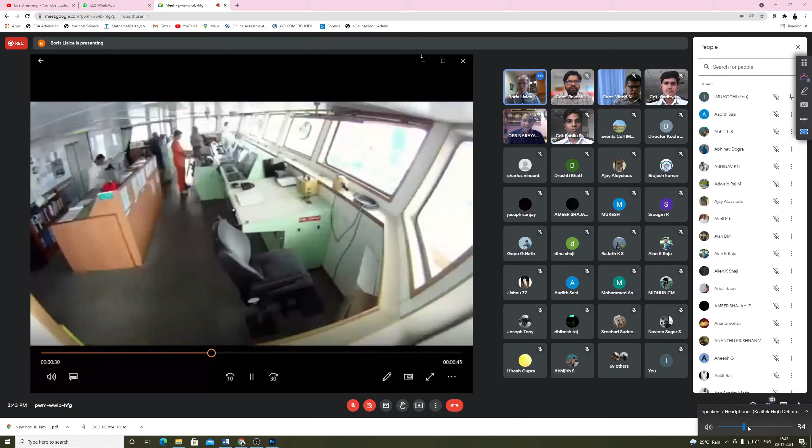I hope it is coming up. There it is. You need to give the sound, Boris, you need to give the sound. I have sound, I can hear it, I don't know if you can hear it or not, but I can hear the sound. I'll try again, because the sound is at maximum so it should be working. No, we cannot hear the sound of the video. Okay, anyway, the video is only another 10 seconds, so it's not much, it's only pictures. What I wanted to go over with this one is just see the pictures of the shipping.

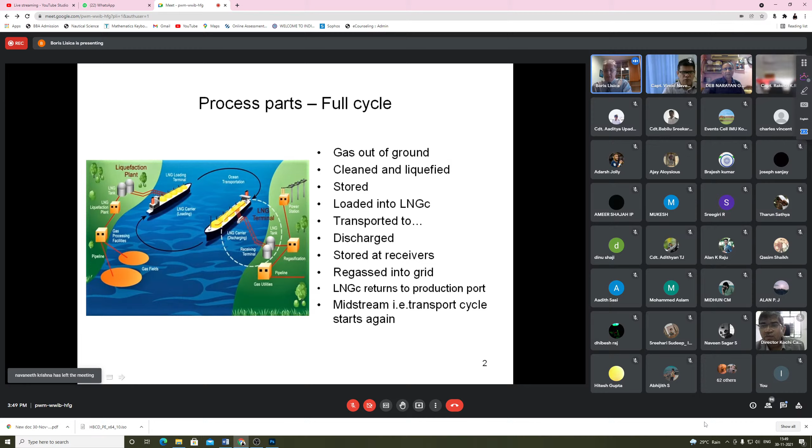I would also, before we go on, actually change the screen so you can look at a little bit better pictures than the one before. I would also like to say how much shipping is part of the total cost of LNG production and sales and everything. Shipping actually takes 20% of the total cost, so it's a very big cost, shipping. Liquefaction is the biggest cost, around 40%, and shipping 20%, this is over 60% just in these two. Production is the cheapest, actually not only production, but exploration and production is the cheapest at 18%.

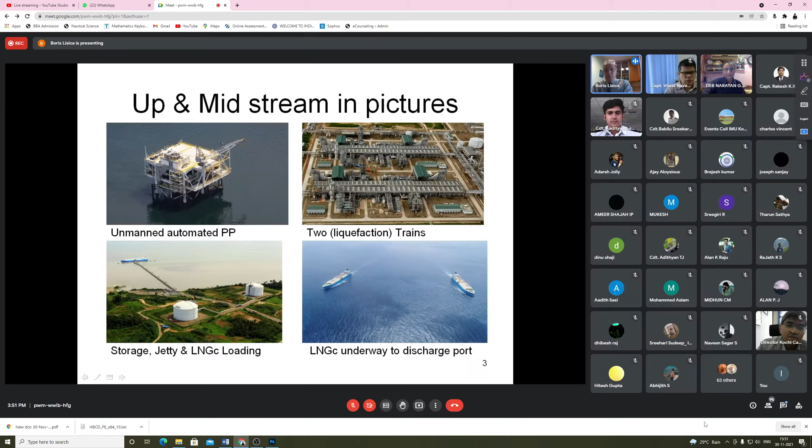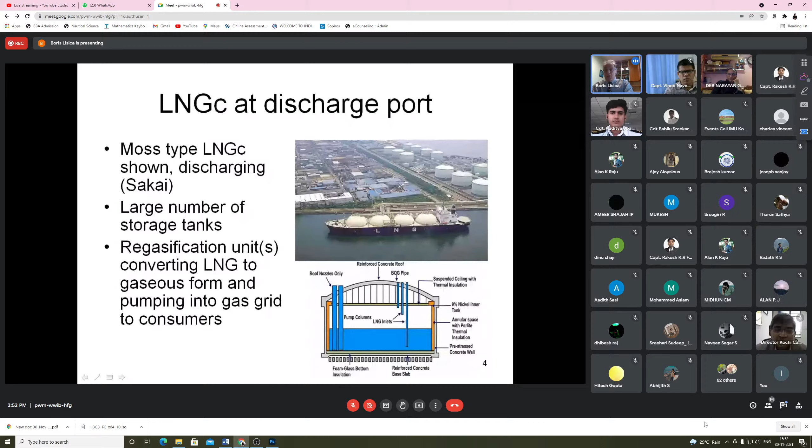You can also see an LNG tank, shore tank, which are very big structures, and the original ones, when all this business started, were rather small, and they were usually sunk into the ground. Today they are all above ground on special foundations, and they are getting bigger every day because technology and everything is catching up with all this. So now they are to the tune of 200 to 250,000 cubic meters each. When you stand underneath one, it's enormous, it's huge. That's just to put perspective onto some of the things that are happening in this industry.

But you can find any of that if you are interested in studying the gas further. You can find it anywhere on the internet or in publications specialized for it.

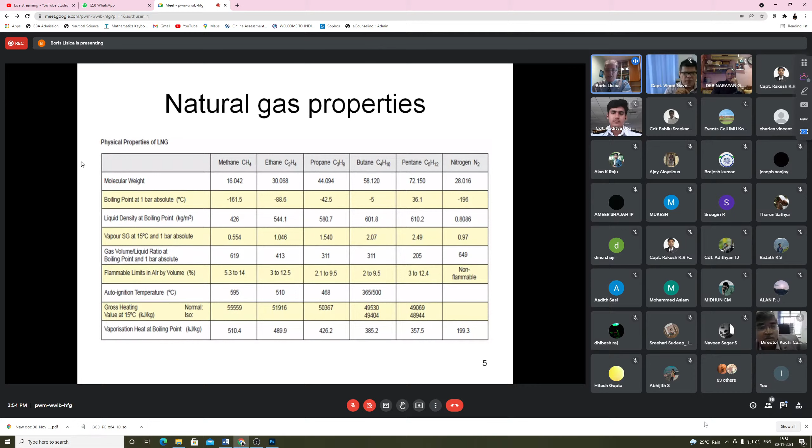Although I would say if you're going to go there, you have to study a little bit more beforehand, because some of the things will not be easily understandable. At least they weren't to me when I was a cadet learning the LNG business.

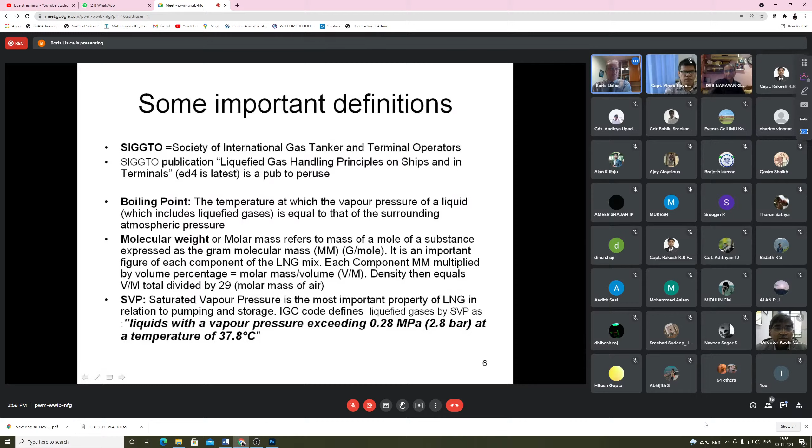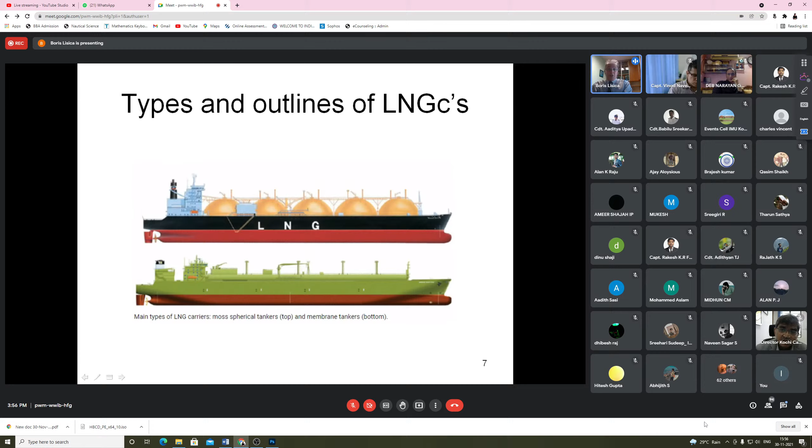Now we will touch on the LNG ships boom. At least when I started at sea, this was something that was just heard about - an isolated niche, same as the entire industry up to the 70s. Then it slowly started picking up, and from the 70s by 2000 there were about 130 LNG ships in the world.

Most of them were Moss type, but membrane ships started picking up in the 90s, with maybe 30 membrane ships by 2000, or a bit more thereabouts. Then in the 2000s the boom started in a big way, at an unbelievable rate. Qatar was, until just yesterday so to speak, the biggest producer of gas in the entire world, producing 77 million tons of LNG annually. Australia has only overtaken them in the last year or two, but Qatar is still very, very big.

That's the early 2000s, when Qatar came online with ships associated with Qatar gas. By 2003 there were already 153 ships, and by 2004, 176. At that time Moss ships started going on the new building decline because of size - at the time they could not go over 135,000 cubic meters capacity, but membrane-size vessels went up to 150,000 by the early 2000s, and then kept on increasing.

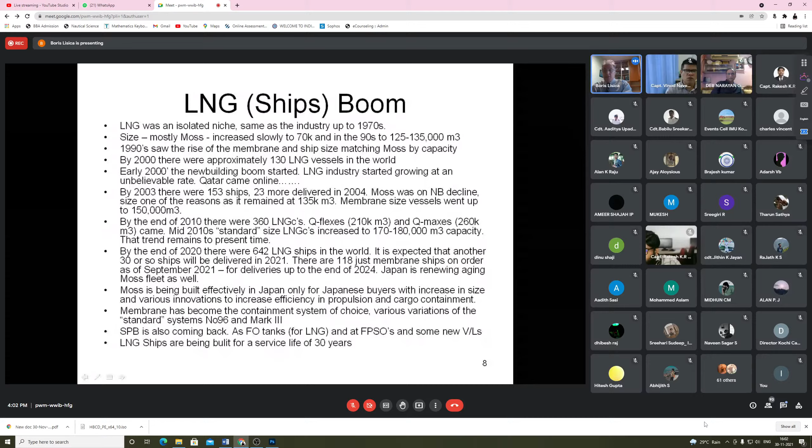Anyway, we go to the next slide, which shows actually what is available of the containment systems for LNG carriers today.

As you can see, this is IHI, meaning Ishikawajima-Harima Heavy Industries of Japan. They invented SPB in the late 80s, and the first 2 ships ever built on this were in 1993 for Alaska trade, and these ships are still in service today. The aluminum alloy thickness is 30 millimeters, and insulation is polyurethane foam 270 millimeters. Moss type is also aluminum alloy, same as SPB, but the thickness of the tank is 50 millimeters.

Then you come to the membranes. GTT NO96 is Invar, which is a 36% nickel alloy. GTT Mark III is stainless steel, 1.2 millimeters thickness of the primary membrane.

What I would like to say while we are on this screen is that we need to mention the IMO IGC Code. IGC stands for International Gas Carrier Code. It is a lengthy full name for this convention that is in force, and the latest one has been in 2016.

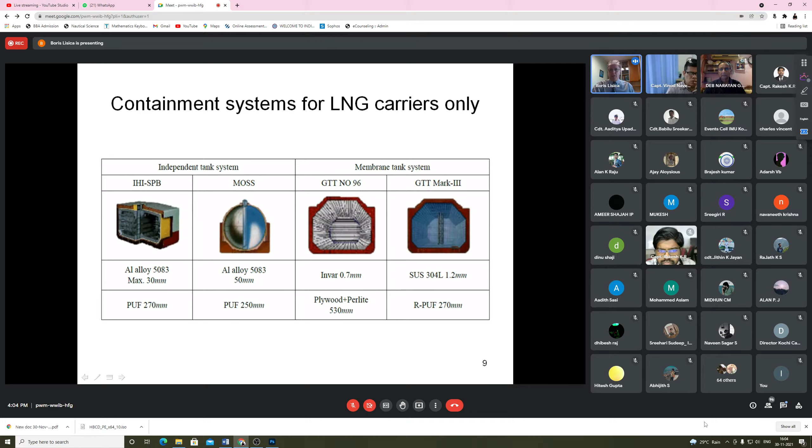The one before that was in 1993, and most of the day's ships were built on that code. However, there were quite a number of improvements as the industry grew and the technology advanced. All these new improvements and new insights were built into the 2016 IGC Code, and this is the governing publication. It's the law for gas tankers. The full name of that publication is International Code for the Construction and Equipment of Ships Carrying Liquefied Gases in Bulk. No wonder somebody shortened it to International Gas Carrier, IGC Code. It sounds much better.

And here we are on SPB in IHI type of vessel. You see these 2 ships on the first slide. They look like an ordinary tanker. You don't see anything different. They have a little compressor house in the back end, in front of the accommodation. Look like an ordinary tanker. Today, the new buildings, in order to increase capacity, have raised the deck up to the trunk deck and raised the tanks up.

Otherwise, it was not possible to build bigger tanks. So they look a lot more like membrane vessels, the new ones, the 4 new ones that came just 2 years back.

This picture shows the tank from inside. The tank is, in essence, a complete crude oil tanker tank, because it has all the girders, all the swash bulkheads, center bulkhead, everything is there, which makes it a very safe tank and reduces sloshing of the liquid. That's why they are the safest, and that's why they are the most expensive, I guess.

This tank is being carried by a huge crane, as you can guess, to be fitted into the hull of these new tankers that have been built just a few years back. This slide shows how it looks underneath the tank. This is the support and insulation. Insulation, if you remember, is polyurethane foam.

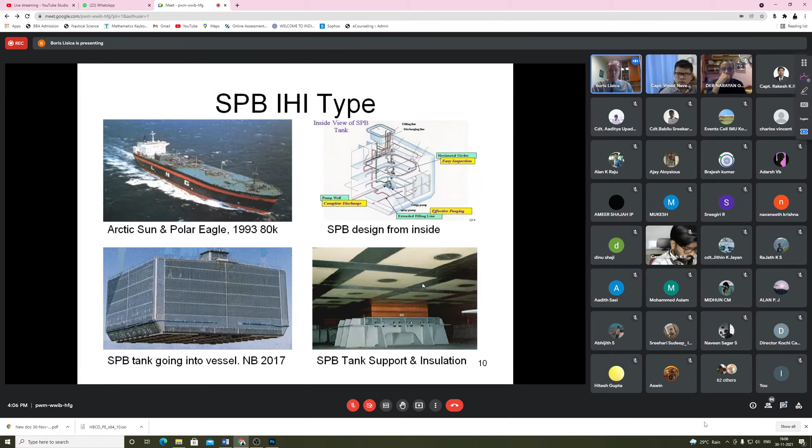We go to the next one. These are all what we are doing now. We are looking at building types of the LNG carriers. And here you can see what it is there for the Moss type. So this is the tank, how it looks like.

It's the old tank. The new tanks are a little bit more elongated in this middle section. They call them apple tanks, like apple tanks. They elongated the equator, and the top sphere stayed the same as the bottom sphere, but the middle was elongated to increase the capacity, because that was one of the issues with Moss type.

They couldn't go further than a certain capacity, because that would make the ships too big. This way they have managed to keep the ships at Panama size, which means being less than 49 meters, this new Panama Canal, not the old one. And that way they have come back into the business, because at 135,000 they couldn't compete anymore.

This slide shows you, this is the tank, and this is the skirt. The equatorial ring in the middle, skirt is something that the tank is sitting on, in the hull. Otherwise it will be going all over the place. And it is supporting the full weight of it.

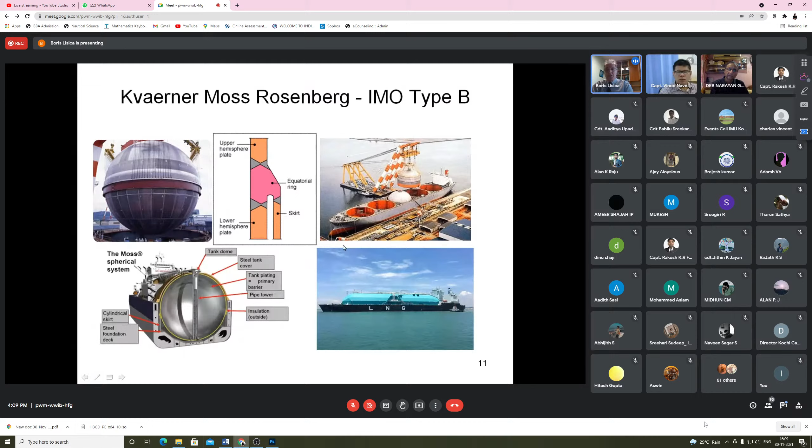A lot of improvements in the Moss technology coming. We will say a few words about that one later.

The next slide is showing a membrane, and this is a generic view of the tank, how it is made. Here in the back is called a pump tower, and this here is an actual cut drawing, or a sketch, of the Mark III membrane tank, indicating all insulations and things like this.

And here below, this ship is Mark III. The difference is right here, Mark III versus NO96. You see the front end of the trunk deck is sort of square. And here it is narrowing down to the front. This is because of the construction issues with NO96 as opposed to Mark III. They have to narrow down the forward end.

This picture actually shows the ice-breaking, classified Arc 7. This is for working effectively in the North Pole or South Pole. These are icebreaker LNG carriers. We have been mentioning them before. I will show a picture later on how it looks when it's breaking ice.

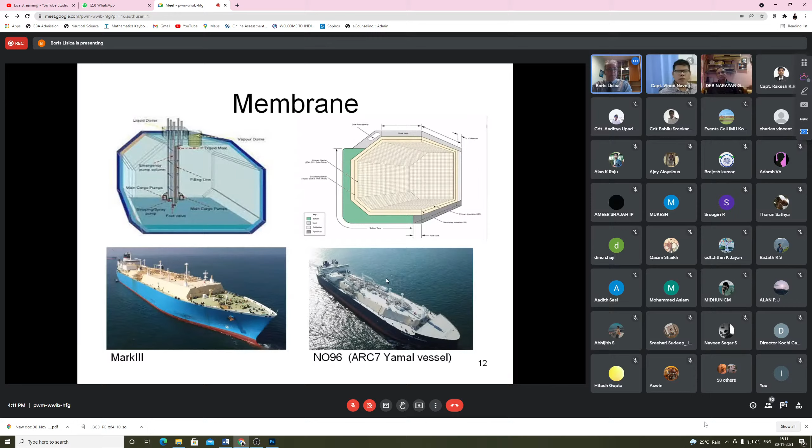Let's go to the next slide. That will give you some ideas of the differences between Mark III and NO96.

I have already mentioned most of it, but what I would like to say is that the company behind these two is one company. Actually, there were two companies in the early 90s that merged eventually into one company. The first one was Gas Transport, that company invented NO96. Then Technigaz company invented Mark III. These two companies merged into a company called GTT, which is a short word for Gas Transport and Technigas. They just collected the names together.

When they just merged, they put on the market membrane type CS1. That one was not very long lived. Only 3 ships were built with it, but it was an interesting combination.

It was a combination of Mark III and NO96, where the primary barrier was Invar and the secondary barrier was triplex. The triplex is epoxy, sort of a composite cloth. But that one, I think, didn't fare very well, and they stopped production and carried on improving each of these membranes. They have made considerable improvements in insulation and just about everything else.

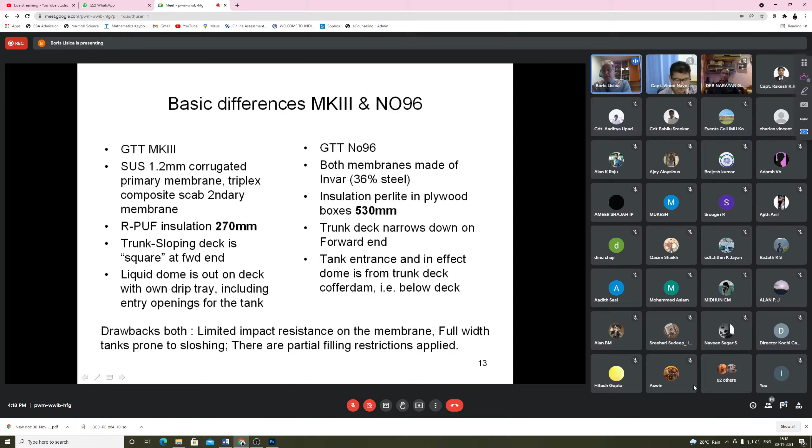Now we go to one very pretty picture. This is actually a picture of the tank of the ship, which was delivered. This was done on delivery of the vessel I was on. As you can see, it was done by a professional camera. This is Mark III membrane, and the tank is about 45,000 cubic meters.

When you come into that tank, it's an enormous cavern. When you come down through that pump tower in the back, which is over 30 meters tall, and look down into that hole, if you are suffering from vertigo, it's not a good feeling. It's an enormous cavern, but spectacular, as you can see, to look at.

The primary membrane, as you can see, is corrugated stainless steel. Of recently, they have improved this because corrugation acts as bellows, as expansion joints, since stainless steel contracts considerably, and there has to be some expansion bellows to allow it to do that.

GTT has improved on corrugations even further. So these ones here, if you see the pointer, are now also corrugated. The longitudinal ones not yet, but these are special machine corrugated. Each piece of membrane comes in 3 meters by 1 meter pieces.

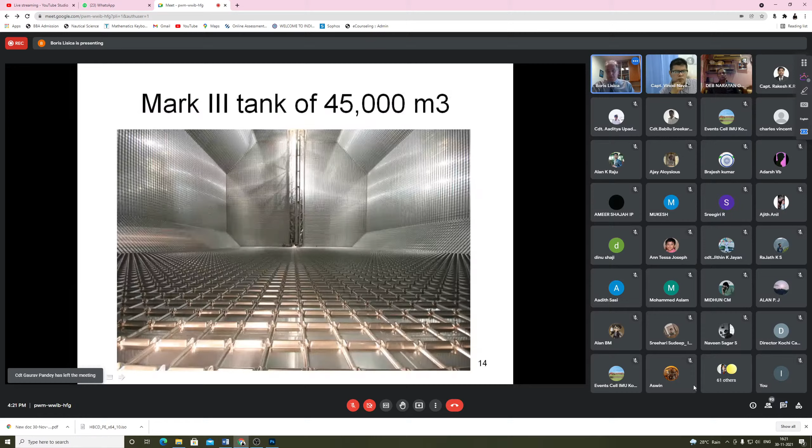Now we will go to the picture of the NO96 tank. Here you can see there are no corrugations. There are just these strips on the bottom, because Invar, during tank construction, is made into a U shape.

It comes as a roll of metal and then goes to a special machine that makes a shallow U. That shallow U is then inserted into the insulation, and in the middle of these two U's there is a strip that is actually holding the membrane in place. Then all three units are welded by a robot.

That robot is a fascinating machine to watch. It travels the full length, all 45 meters of the tank, from one end to another. The corners the robot cannot do - those are done by highly qualified and experienced welders.

These welds are very carefully checked by experts before they are allowed to be okayed for use. An interesting fact about Invar is that despite 36% nickel content, it will still corrode if introduced even to just humid air.

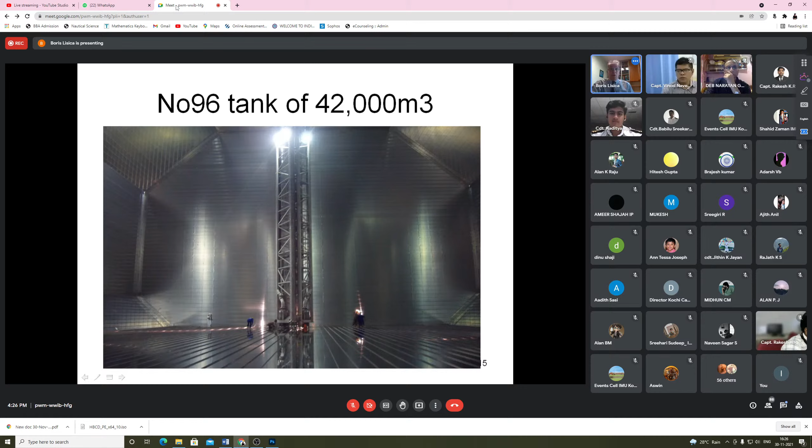Now the next slide goes to propulsion developments. Why I am going on to this is because it's important - it also drives the industry towards membrane improvement and insulation improvement, and has changed the original concept of the LNG carrier. The LNG carrier originally, any kind - Moss or membrane or anything - was a steam turbine, single prop vessel, usually with a bow thruster.

That first changed with Qatar Gas building Q-flexes and Q-maxes. The original vessel always burned boil-off gas in the boilers, producing steam for propulsion. Now Q-flexes and Q-maxes come along and they don't burn anything - they fitted a liquefaction plant on the ship and two traditional main engines, each on one propeller, running on heavy fuel oil. This was a big, big change in the concept.

However, that didn't prove out so well. Most likely, I hear on the grapevine that they are trying to think of converting these engines and diesel generators to burning gas, because HFO is both more expensive now than gas, and also a problem with NOx and SOx reductions that IMO is pushing - they'll never achieve that on heavy fuel oil, even low sulfur heavy fuel oil. So like in the tanker industry, this is going to be a big problem for these ships. However, the conversion cost is about $20 million, so I'm not sure Qatar Gas is going to invest in it. Maybe they'll rather scrap the ships than go that way, but it remains to be seen.

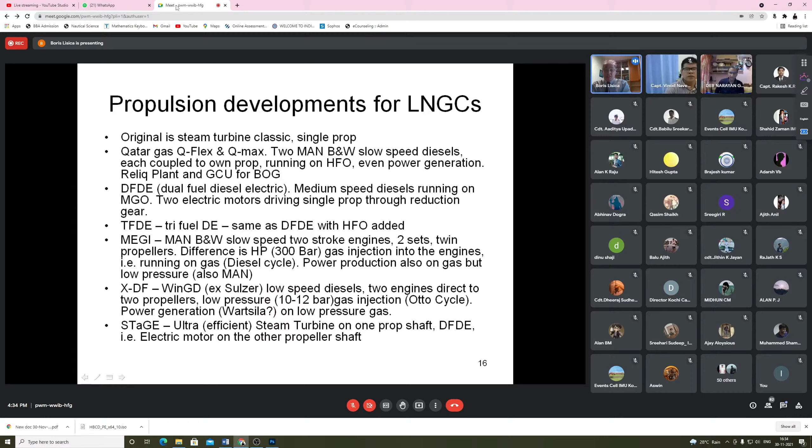It was one generation of ship that was built only on this UST system, and then of lately they came with this STaGE, which is UST plus DFDE. So you have a steam turbine driving one propeller and electric motor driven by generators on the other shaft, which is a very interesting detail for how the shipping is going, in which direction they want to have facilities of both for some reason.

Anyway, now I think we are finished with highly technical details. We'll look a little bit at better pictures. And this is a picture straight out from the shipyard.

And this is a keel being laid. What was traditionally keel being laid is a very small piece of steel. Now the pieces are coming in gigantic bits and pieces like this one.

And this is for the LNG carrier, and you can see the scaffolding there. Scaffolding comes onto the keel blocks right away erected so that they can carry on with the membrane construction as soon as the ship is closed.

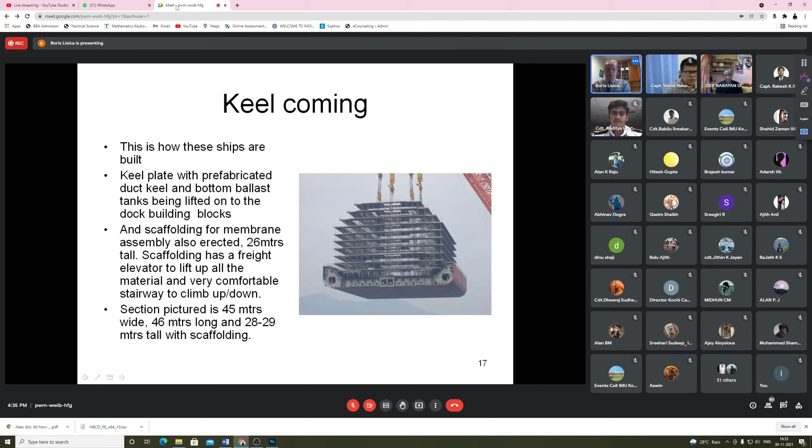And you can see how big is this section. When you are nearby one and hanging up in the air, it's enormous. And this is part which was there in the air is coming on the blocks, and you can see here.

Here is one tank, this is a cofferdam, and this is another tank. Well, it's not a tank, it's just a keel. And then comes the complete ballast tank on the side and the upper deck, and then comes a trunk deck on top, and comes a bow and the stern, and then the ship is launched.

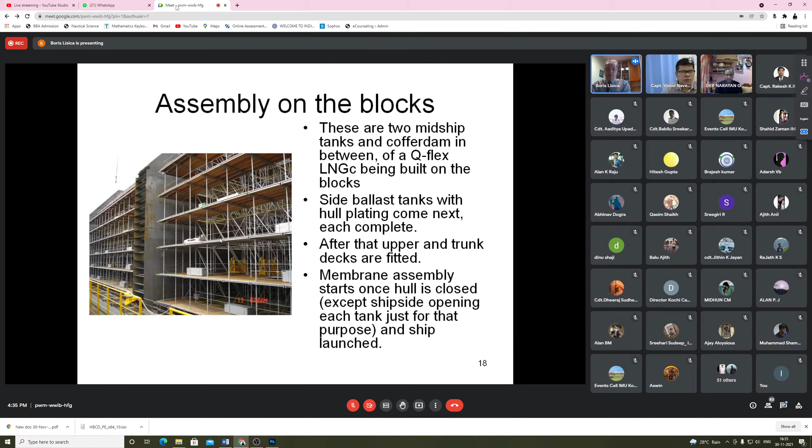Once the ship is launched, the construction of the barrier starts. Next slide is more technical, and it shows a pump tower.

This makes for a picture which is interesting to see, and to the eye who does not know, it looks also very strange. But the pump tower is over 30 meters tall and three-legged, three legs.

And this here is a cargo pump. One on the other side is another one, and here you have filling line on the right slide or slide picture, and in the middle is a pump tower base, because a pump tower obviously cannot be attached to the membrane, and it cannot be attached also to the ship's hull, because it will pass through the membrane.

Who is going to make this not leaking? Not possible. So this pump base tower is in a special way connected to the hull, and then the tower is sliding up and down for shrinkage and expansion. This pump tower shrinks 8 centimeters from the ambient to the minus 162. So it has to travel up and down on that slide. But also you have to prevent a cold temperature going to the hull.

And then, except spray nozzles, which we'll come to later, everything else that is in the tank is fitted onto the tower. Absolutely everything. And then every bolt and nut is tack welded, so there is nothing ever going to come loose, because it will damage either the pump or tank itself. And this is every single bolt and nut during the building verified being welded, and nothing is left to chance there.

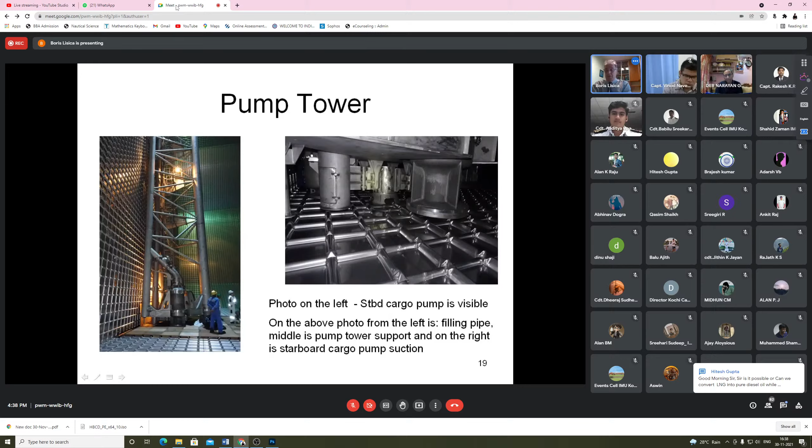Here we come to another strictly LNG topic, showing you liquid dome and vapor dome. Liquid dome is an extension of the pump tower out on deck and connected into the pipelines. I have put a name to each of these, what they are.

But I don't think it's worthwhile going through what they are one by one. If anybody has any questions after, we can discuss. What I would like to show, these two here, if you can see the pointer, are safety valves.

And on the other slide is a vapor dome. Vapor dome is in the middle of the tank, exactly in the middle of the tank, and only vapor is coming out through it. Although on NO96, spray nozzles are also fitted into the vapor dome. But this is neither here nor there. The most important part is somewhere that you can vent the vapor, and somewhere you can load or discharge the liquid.

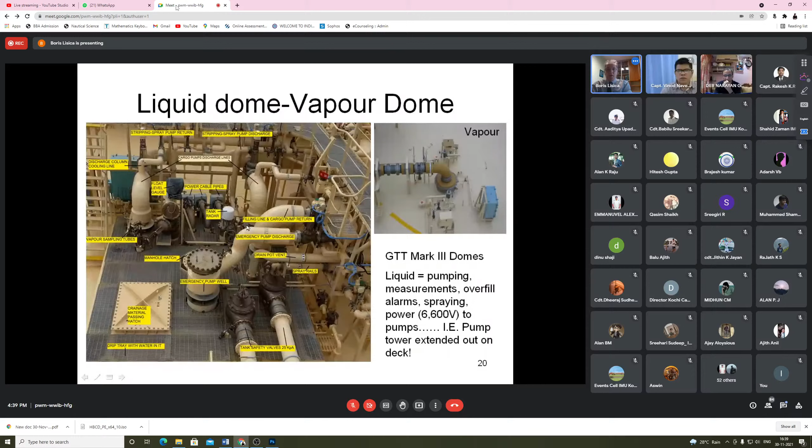Now, you remember I said something about BOG and BOR. There will be a little comparison. BOG stands for boil-off gas, and BOR stands for boil-off rate.

Boil-off rate, I will use the old one at 0.15, and most standard size today, 175,000 cubic meters cargo capacity, equals to 262.5 cubic meters of boil-off gas per day.

Vessel has to use this gas responsibly, meaning no waste, no venting. So it has to be used either in propulsion or in power generation, or both, or liquefied, or a mixture of all, or any of these three together. And there are, trust me, mixtures of everything.

And this is just for comparison further down. Older steam turbine vessels were using 355 cubic meters per day. DFDE 270, MEGI 227, XDF 222.

So the new ships, that's why I was mentioning this requirement to reduce BOR. They have to reduce to 0.1 or below, otherwise they wouldn't be able to deal with extra BOR. They have to burn it somewhere, and that means GCU, which is a total waste. GCU is gas combustion unit.

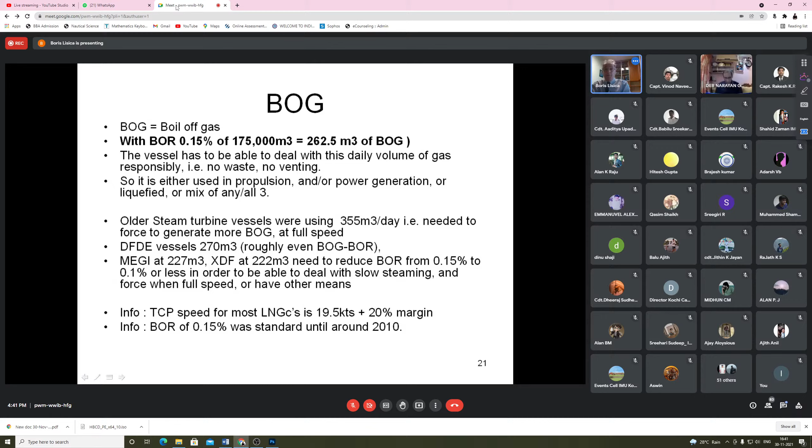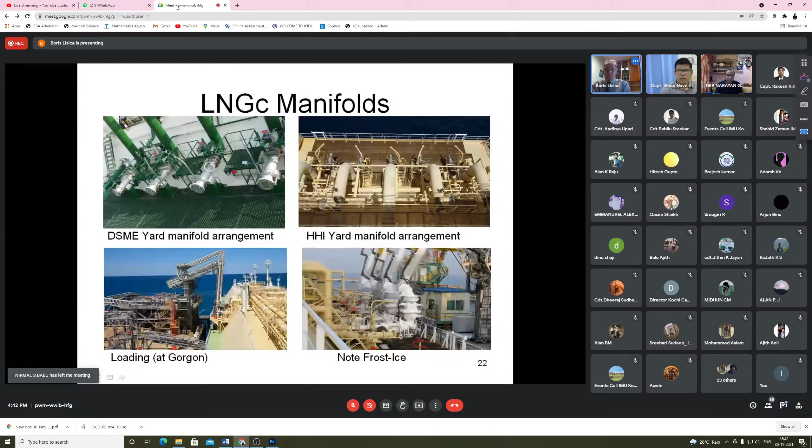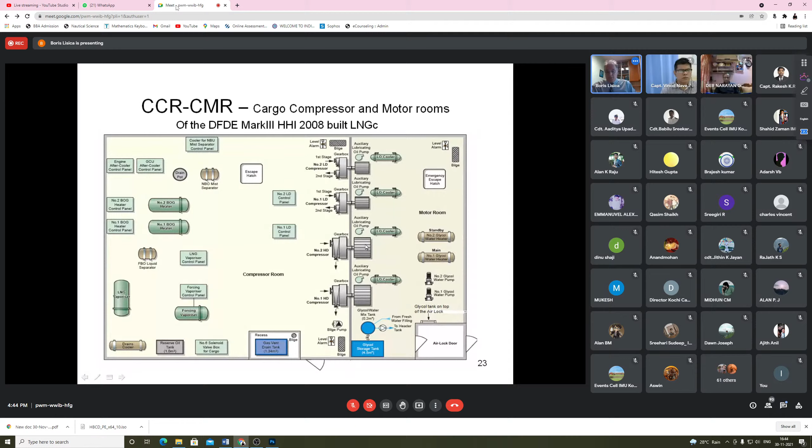Now we go into cargo operations, starting from dry dock or a new building back to dry dock. They are listed down in the order of the sequence they come. We have already mentioned tank inspection. Then before you go anywhere else, you inert insulation spaces with nitrogen. Nitrogen is produced on board, and there must be no oxygen inside at all. And then you inert cargo tanks and pipelines. I will go briefly through all of this.

I'll go just back a little bit to inerting. Each membrane has its own pressures and everything else associated with the insulation spaces separately. So this is depending on the type of the ship, you adjust accordingly.

So now we go to inerting cargo tanks and pipelines. Inerting is a multi-purpose operation which reduces the dew point of the tank atmosphere to below -40 degrees to avoid any possible condensation anywhere in the system. Condensation at cryogenic temperature creates hydrates, similar to CO2 white powder, which can block all sorts of things, so the dew point must be very low.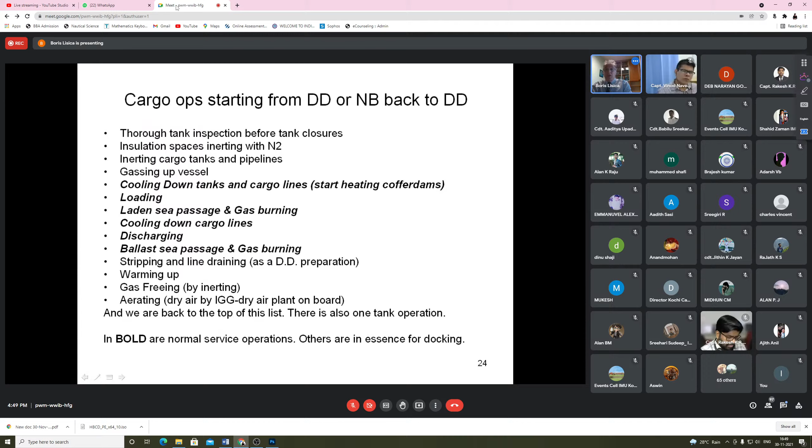Anyway, we won't go too technical. In any case, just cooling down the tanks - tanks are cold when average tank temperature reaches -130 degrees centigrade, and then you can start loading after cooling down the lines as well.

The position of the ship during the operation is strictly checked and recorded on an hourly basis, and any movement is immediately taken care of by attending to ropes and all sorts of things. But you can never take out of action a ship passing by and pushing the ship on the ropes in any direction.

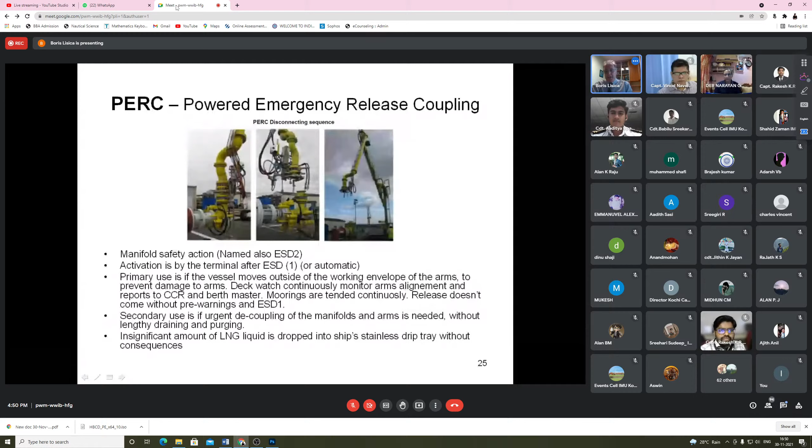And when the system comes out of the envelope, emergency shutdown is activated, and then immediately the arms are decoupled. The good part is it's a very close coupling, so there is a very small amount of liquid which spills down onto the drip tray. The drip tray is stainless steel, so there is no damage. The only thing is when the crew hears all the alarms going, crew moves away very quickly. This is part of the training.

Now we go to loading cargo. I'm not going to dwell on this too much. This actually shows the exact sequence of events as they happen. If we start reading through it, this is going to be too complicated. But I would like to say something about one feature.

Strictly in the LNG trade is the pre-operations meeting with the terminal. This is a very serious business and a very serious meeting. Every single detail is discussed, the plan of action of any kind is discussed, and papers are signed, and before the meeting nothing else happens. So one has to come prepared to it, knowing your ship and your data, and provide everything they ask.

Another part of it is also inspection by the berthmaster. Even sometimes before connecting loading arms, there is inspection by the loading master who goes all around the ship and checks everything, and then says, okay, let's go.

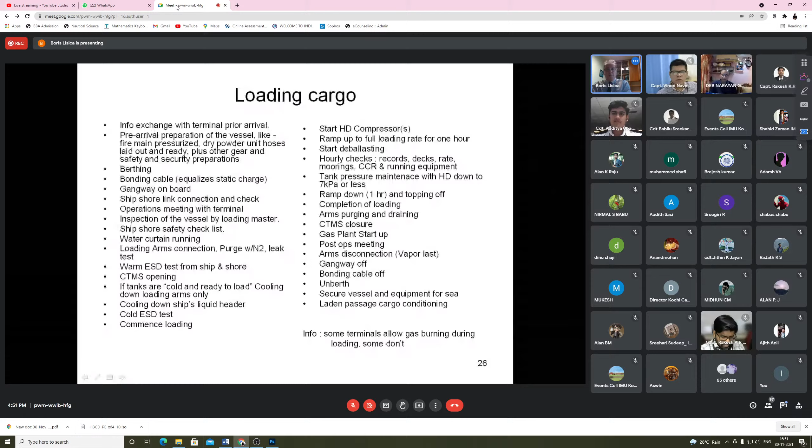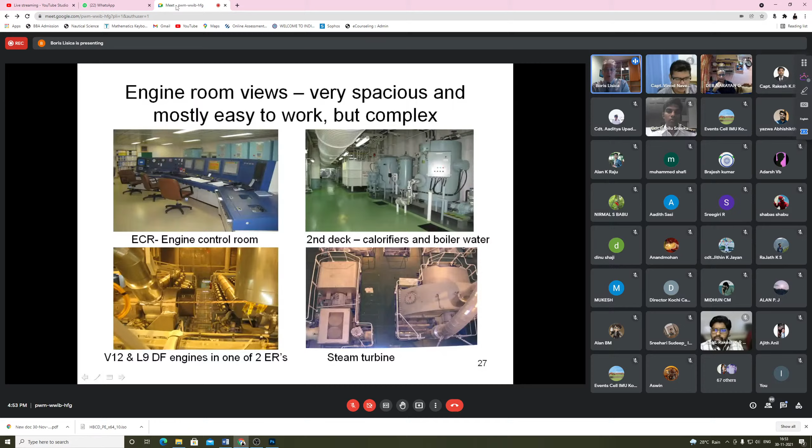I will interrupt some of these more technical bits with sightseeing pictures.

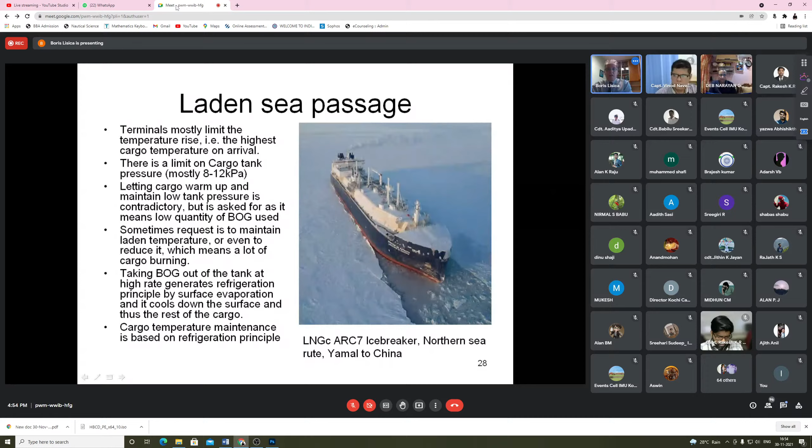There's no way anyone can casually walk into the terminal, and even less so turn up at the vessel. The vessel always receives a visitor list long before berthing, which includes even the ship's crew joining and anyone else that will board. Nevertheless, the ship has to follow ISPS requirements to the tiniest detail and verify each person against the list and ID - they are not allowed on the ship without ID. ISPS is the same all over the world, and those not allowed to come to the ship won't even try, knowing where they are on LNG ships.

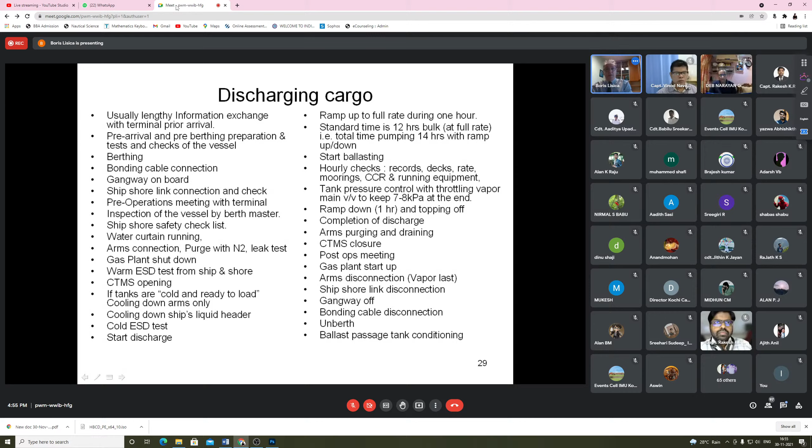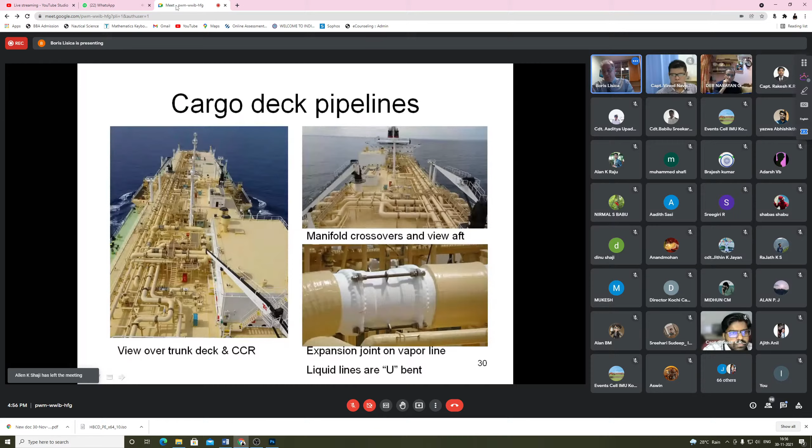Then we go on to ballast passage. Ballast passage is heel-dictated - how much heel you have on board. Heel is another strictly gas expression; it's liquid left on board after discharging, deliberately left for a purpose, or if stripping out, it was unpumpable. With that heel, you do all sorts of things, including cooling cargo tanks, preparing the ship for loading, and burning it all in propulsion and power generation.

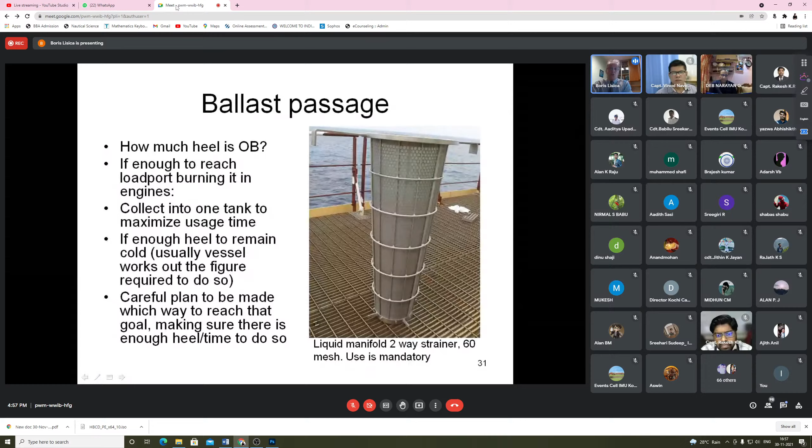On the right-hand side is another tidbit of LNG specialty - the manifold filter. This is a Mesh 60 filter, a two-way filter that goes into the manifold, with everything passing through it, in and out. So just to show some parts of it.

We have been talking about hazards, and these are more, how do you call it, human hazards - although flammability is not only human - and mitigation that the ship has built in or does on its own on an LNG carrier.

First and foremost, the ship is built with safety in mind, and everything, all the systems are designed around safety. The methane in gaseous form is in flammable range between 5 and 17% in air. All the ship systems are closed circuit, so there is no gas leakage of any kind. Stringent safety and operational procedures are designed to remove ignition sources and oxygen in areas where that possibility exists.

Not to speak about gas detection just about everywhere, and at 60% LEL, ESD is activated if it is detected in critical places. Fire detection, I don't know how many hundreds of detectors are of all sorts, fire, heat, gas, everything. This is a funny part, is that we call it a gas chamber.

It's a smoking room. On gas tankers, there is only one smoking area on the ship, built on purpose, for purpose, and it has a huge air exchange ratio in the safe way. And there is no smoking elsewhere, neither in the cabin, nor on the bridge, nor in the engine room, not in the bilges, nowhere.

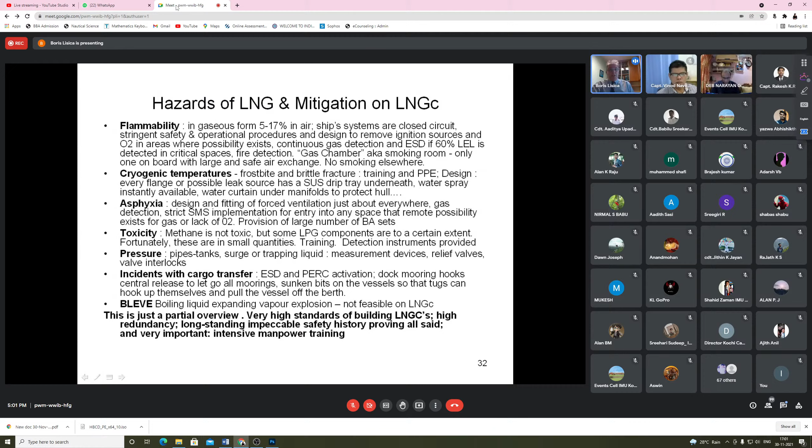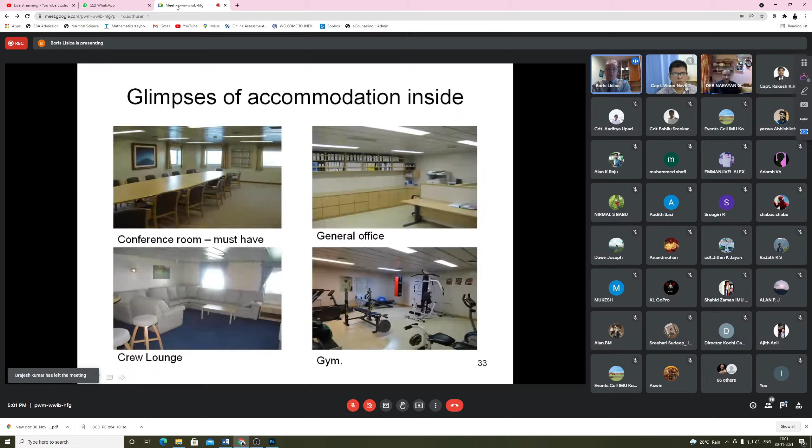Then you have incidents with cargo transfer, dock moorings, and everything else. So now we will just go quickly through at least some of the pictures without going any further, because I have been too technical.

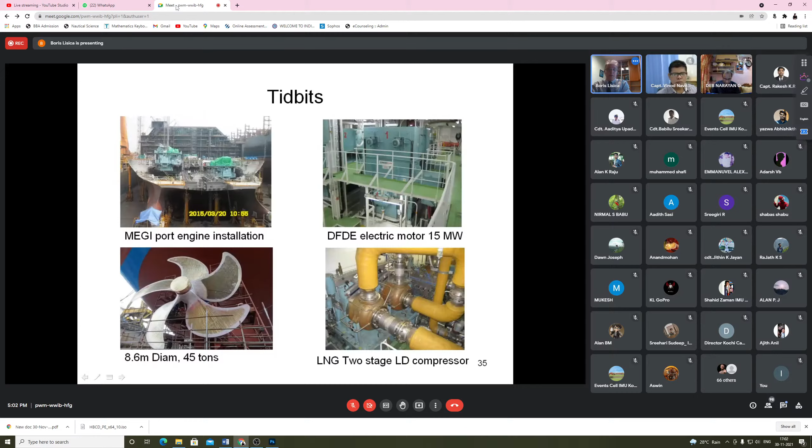And you see this, these are safety features. We will go quickly through. And this is some shipbuilding pictures. And this is MEGI port installation of the engine. We will bring this to the end in a minute. Just let me go through the slides so you can see some.

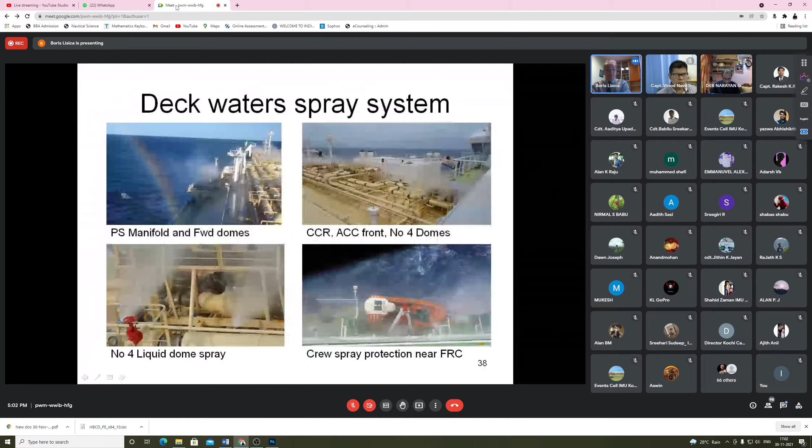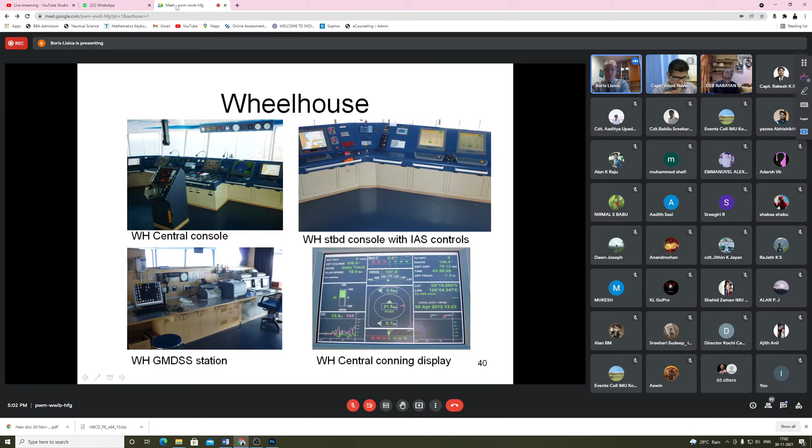And here are some just for fun pictures. If you have a free fall lifeboat, you launch it in a free fall. And then you have to do, in any case mandatory by SOLAS, a man overboard exercise. This one shown here in the picture, it wasn't a human, it was a dummy thrown into the sea and recovered.

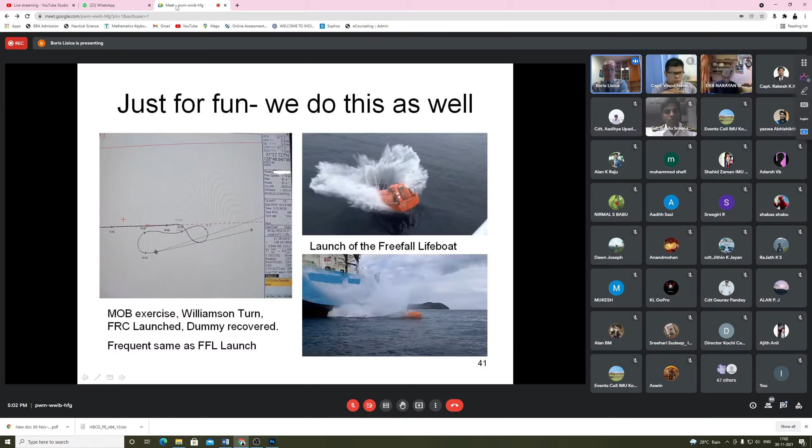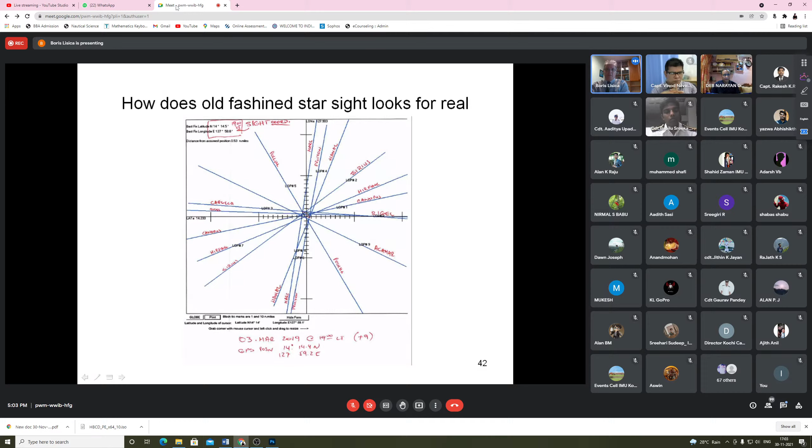And this is something I am sure you're not going to be seeing very much - this is a star sight, as it is properly done. With ECDIS today, I don't think anybody will be doing that. And this is something you should not be doing ever on a gas tanker - it shows a gas cloud enveloping the vessel.

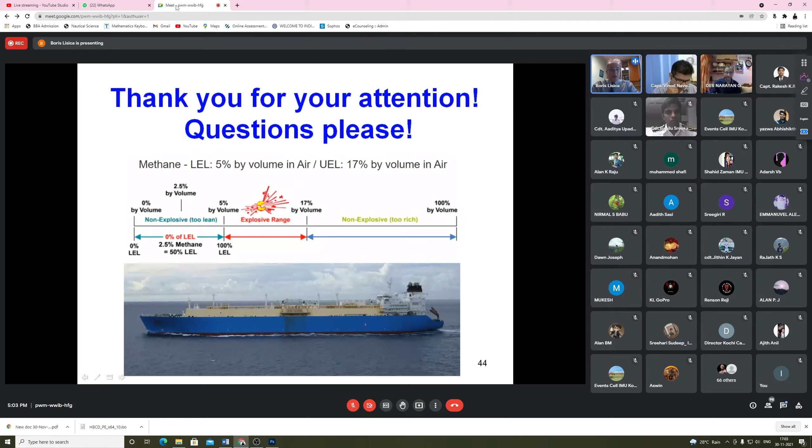And there it is. I leave some pictures there to look at, and if there are any questions, let's go. Thank you.

I hope I was not too technical, although it is very difficult from my perspective, being very close to the business, to extract something that will be understandable and provide a picture of the entire business, because as you can see, there is a lot to it and it's not that simple.

Yeah. Yes, sir. This is like masters in LNGs.

Captain Boris has actually covered a semester syllabus in 1.5 hours. It's a full syllabus of gas tankers. You took us right from the history, showing the chronological order of development of gas tankers and gas tanks. I think you actually stripped the gas tankers for us. It was beautiful to see those stainless steel tanks, the inside pictures, probably something we have never seen. You took us through the different types of tanks with wonderful pictures, giving us good insight into what really is a gas tanker. You even showed us some future developments, very interesting figures for cadets. You said there are 30 yard deliveries in 2021-22, about 2.5 gas tankers every month, and with 640 gas tankers already, it's a market that is coming up. I'm sure these cadets will be sailing on one of those gas tankers in the future, and they will definitely remember Captain Boris for this lecture. Thank you.